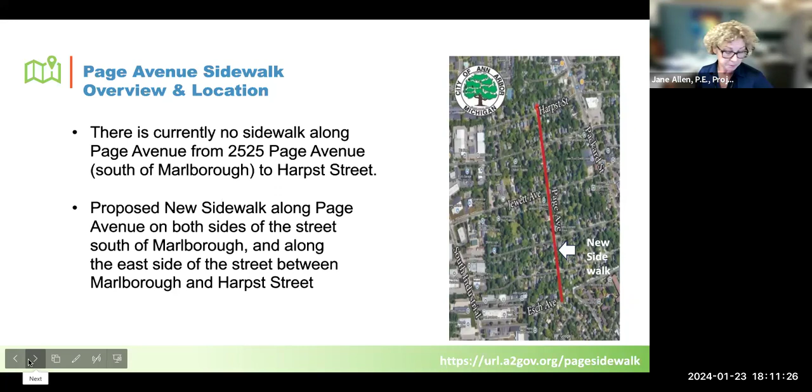Oh, we got that. That's the history. So,

There were some resident recommended installations we're not proposing tonight due to current city policies. A lot of people suggested converting the street into a one-way so we could maintain a pedestrian boulevard sort of thing within the existing footprint of the road, so we wouldn't have to relocate curbs or put sidewalks behind the curb that currently exists, because the right-of-way on Page is so narrow.

So these are two things we can't propose for this project, but we have made some consideration based on what we heard.

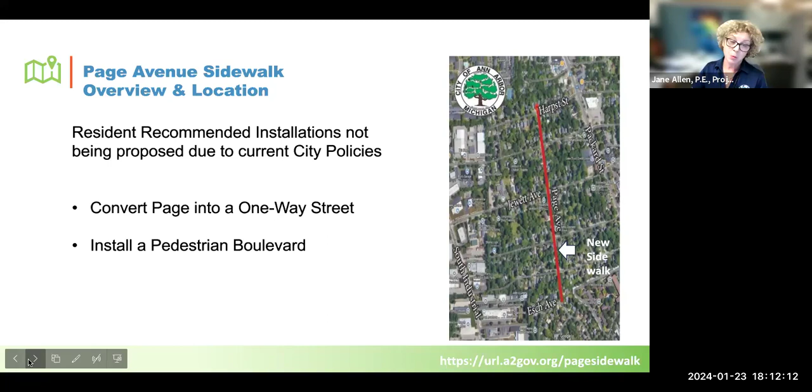Yeah, so you gotta go back one. Couple. Two more, Jasmine. Forward or backwards? Backward.

Okay, so what we plan to do is construct a 5-foot concrete sidewalk to connect to the existing sidewalks along Page within the public right-of-way. The public right-of-way is a platted area used for public utilities — roads, water, sanitary, storm, sidewalks, curb and gutter.

I know a lot of people have considered that when there's not a sidewalk there, that land belongs to them and they can put in fences or plant trees. However, it is a public right of way and we would like to put sidewalk in there.

So what we thought we would do is put the sidewalk on the east side. It will require replacing some driveway aprons along the path and relocating some utility poles, street signs, some landscaping and some existing fences. However, I'll mention in further slides that if we do intend to remove something in the sidewalk path during excavation for installation,

we will always be in contact with residents prior to construction, and therefore you can opt to relocate your items prior to construction. If we were to remove them during construction, we would indicate to the contractor to place those items behind the right of way, such as fences and landscaping items. But as far as trees, the contractor would remove those for you.

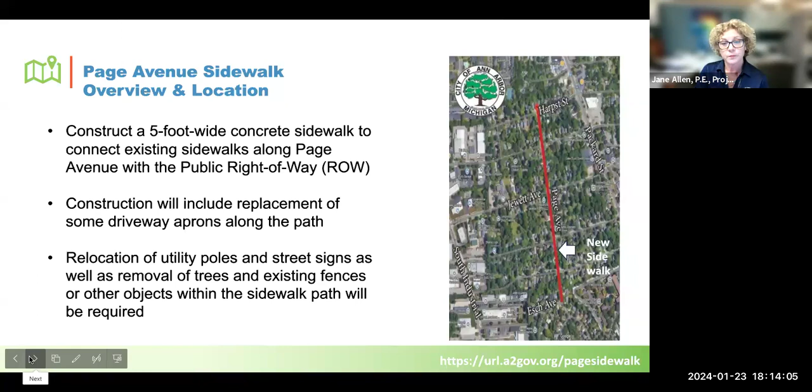As I said, it was a very narrow right of way, so only 40 foot, and currently the road width is 23 feet. People do park on Page, but it really doesn't provide enough room for two passing cars and a parked car. So what we intend to do is reduce the width of the road to 20 feet.

Each traveling lane will get 10 feet. That allows us to relocate the curb on the east side 3 feet into the existing roadway, which will then allow some landscaping on the east side to be saved, and also provide more accommodating driveway length, because so many driveways and garages are so close to the right-of-way line.

We heard from a lot of residents that they wouldn't be able to park their car and stay off the sidewalk on the existing length of their driveway. So if we do this bump out—and I call it a bump out, but it's really going to be a narrowing of the entire length of the road—we can accommodate 3 extra feet on the east side.

The on-street parking that will need to be removed with this does have to go to City Council for a vote. There will be a hearing, and we will put the date of that City Council meeting on the website so everyone can be informed. They can come to the City Council meeting and express any concerns they may have about losing parking.

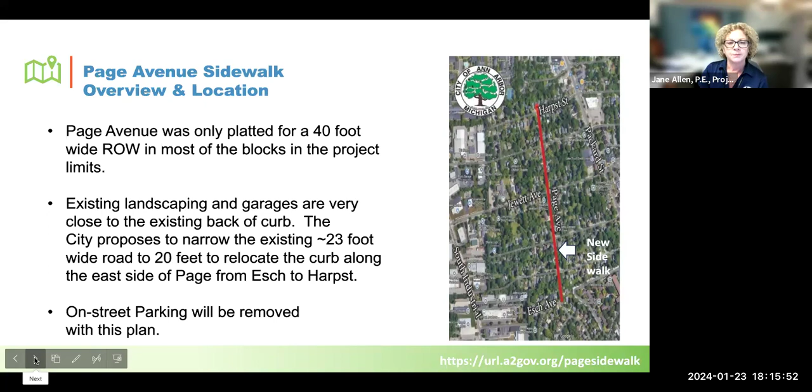That will affect the narrowing of this road, and therefore the original proposed locations we talked about during the walking tours, which were behind the existing curbs as they are—people were not very happy about that. So I'm hoping there could be a compromise here, and everyone gets a little bit of what they wanted.

Thanks, Jasmine. So this is just the overview of the entire length of the limits of Page. You can see north is to our right, so we start from the south and go north. You've got the 2 sidewalks on that first block south of Marlborough. Jasmine, if you want to zoom in a little bit.

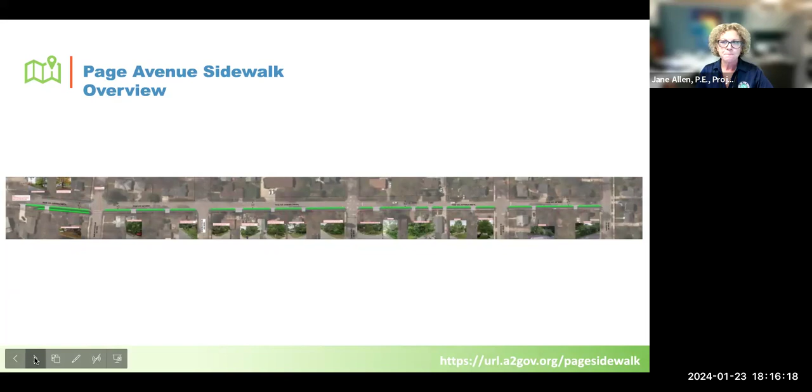We will continue to hold that sidewalk on the east side, giving a 3-foot buffer zone, like a lawn extension. We need that for street signs, and it also allows snow storage in the wintertime. So we will start the narrowing of the road all the way near Esch to provide sight distance on that little bit of a curve.

We are able to put the sidewalk right up against the back of curb on the west side just for that one parcel, because there are no driveways off that side of the parcel, and also the few signs that would need that lawn extension space have been deemed to be relocated.

So Jasmine is just going to zoom through the entire length. I know you don't see this very well, you can't see the writing, but the consultants are going to go block by block and explain the changes that were made since we heard from you, the proposed design we've come up with, and any impacts that we weren't able to address. Thank you very much.

So this is just a cross-section view of what it might look like from Marlborough to Harpst, because the sidewalk's only on the east side. So where you see that woman walking is a sidewalk.

These are kind of generic drawings, so they don't actually look like your neighborhood homes. I couldn't get a garage right up at the edge of the right-of-way there, but you can get the impression where that tree on the east side is over that concrete. I wanted to indicate that might be a location where a tree might have to be removed, but you're maintaining that driveway width if your driveway went from the back of sidewalk all the way to your garage.

Thanks, Jane. As Jane mentioned, we're going to go into a block by block analysis. The exhibit on the right side of the screen is similar to what we brought to the walkthroughs, but modified for the new design layout and revised impacts. Some blocks will look similar to previous impacts for a number of reasons, since the location remains within the right-of-way, grading limits, or sidewalk limits. But to the best of our ability, we did modify these with the constraints that remain.

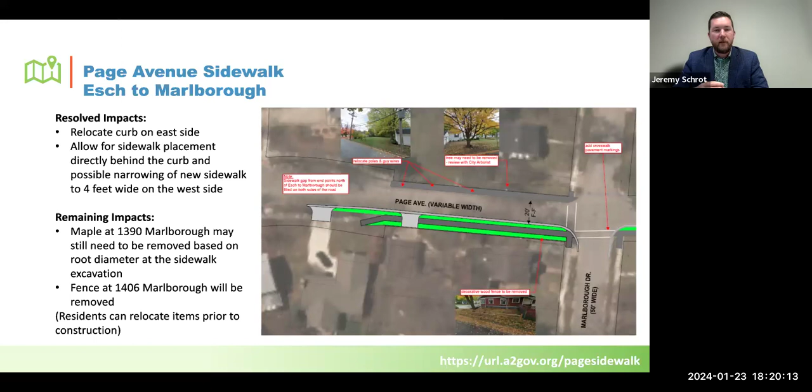Next block, you're going to see a common theme - the 20-foot width of pavement and the 3-foot greenbelt area specific to snow storage and buffer zone between the walking public and the driving public. That provides an additional 3 to 4 feet between the sidewalk and the right-of-way, more buffer than we had before, which was roughly 1 foot off the right-of-way. Because of that, it lessens impacts of vegetation removal and especially tree removal. A number of trees originally planned for removal have now been removed from concerns because they're far enough away to save. There will still be vegetation and possibly tree trimming needed to maintain minimum height and lateral clearances, but it's better than what we looked at previously.

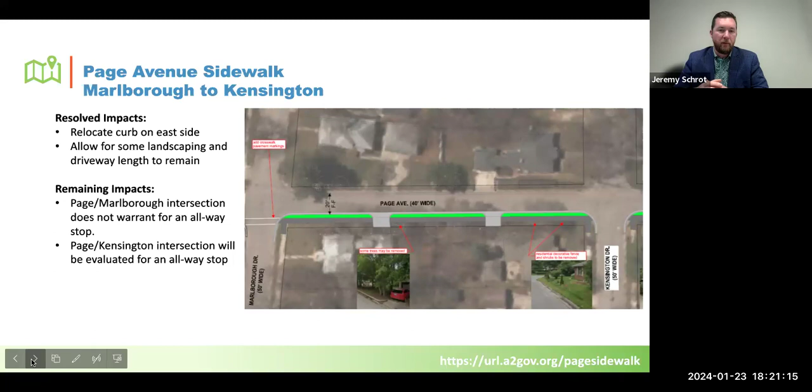Moving to the next exhibit, this area is going to be very similar. Again, maintaining that 20 feet and the 3-foot width between back of curb and sidewalk. You'll be a little further away from some bushes and adjacent vegetation, but it will still need to be trimmed back to provide the full width sidewalk and greenbelt area. There are a couple of smaller trees we were able to save as part of this, but overall it's still similar to the previous version.

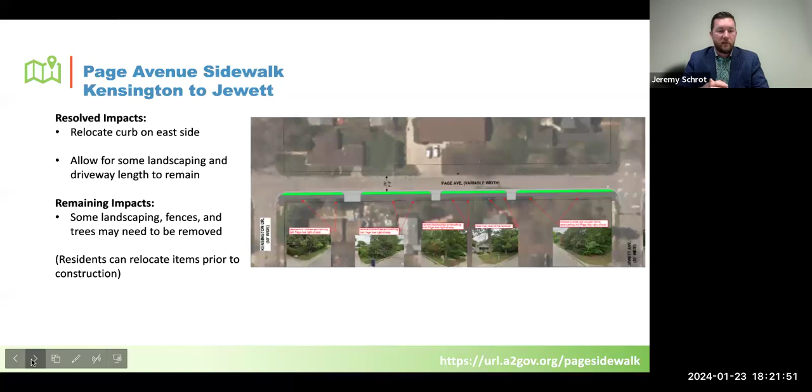Going to the next block, same theme - you're getting a little more driveway space than what was previously out there. There was a handful of trees we were also able to save in this block between Kensington and Jewett, that were fairly close to the right-of-way, or that we were able to gap into one of the greenbelt areas. So for the most part, we're still maintaining minimum removals as possible moving forward.

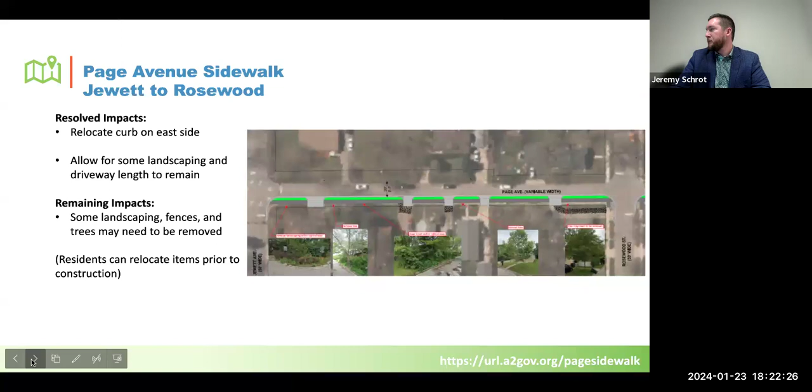All right, and then we get to the last block - similar theme as before with that 20-foot width of roadway and the 3-foot greenbelt area. But again, there were a number of trees in this block that we were also going to remove, and those have now been removed from concerns. There's still a handful of existing bushes and shrubs that will need to be addressed as part of this project, but the impact will be far less than what we looked at through our walkthrough.

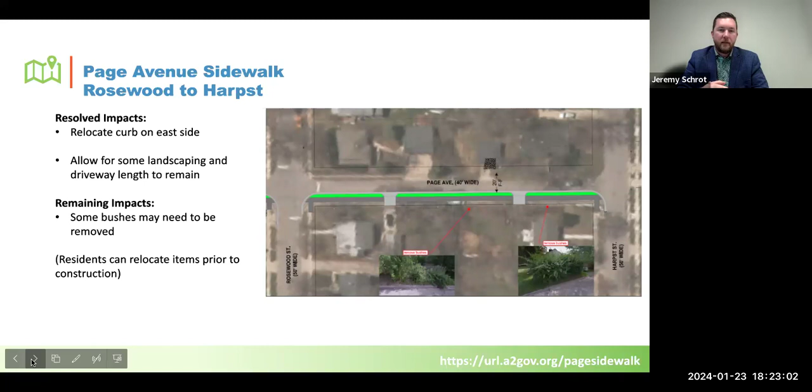So these are all the designs that we have block by block for our project on Page. This is the timeline you can expect for this project to take place in your community. We've already done the public engagement, and throughout the Christmas season we were working on the designs, which we presented to you this evening.

You can expect to start to see some construction on your roads during the summer and fall of 2024. So with that, at this time we will begin to take questions. We'd love if you could drop your questions in the Q&A chat, but if you'd prefer to raise your hand, you can do that too. If there's a question you may not feel comfortable asking aloud, you can always write in your question or email it to our project managers. I'll wait to see if any questions come in or any participants raise their hand.

Jasmine, I wanted to point out two transportation items we were able to address, so it can avoid some additional questions. There was a request for a 4-way stop at Marlborough and Page, and also Kensington at Page. There are warrants that need to be measured to qualify for a 4-way stop, because it's not so much a speed management installation, it's more of a right-of-way situation - who gets the right of way when someone comes to the stop. Marlborough and Page had already been evaluated and it didn't meet the warrants; we will do an evaluation there again. The one at Marlborough and Page did not qualify, but we will evaluate Kensington for an all-way stop. Also, the existing raised intersection at Jewett will remain, but it will be replaced in concrete during the resurfacing.